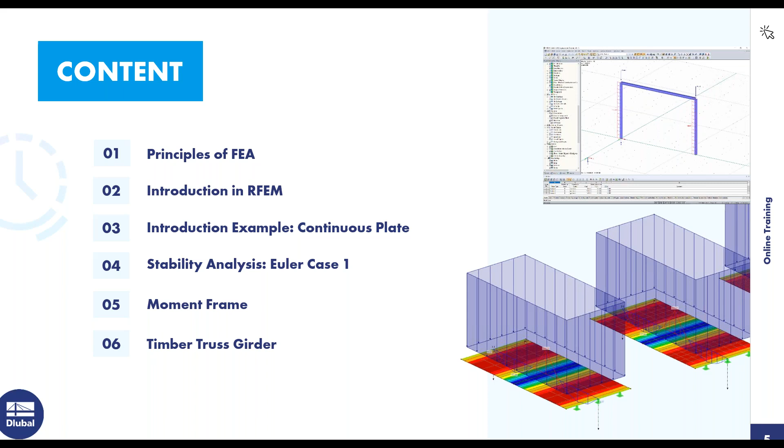With that said, we can jump into going over the basics of FEA. When using computer software, it's based on the displacement method, and another method you may be aware of is the force method, where the unknown is the force, and the internal forces can be calculated based off of this. With the displacement method, the unknown is displacement, and to solve for this, the displacement vectors must be calculated, and then the internal forces and support reactions can be figured out. The main problem today is when it comes to analytical solutions, they can be difficult to determine for large complicated structures.

Doing hand calculations for some structures with complicated and odd geometry can almost feel impossible, and the limits are being reached with large complicated structures, so it's difficult to get accurate results. This is where FEA software comes in. Complicated structures are modeled and converted into a finite interconnected element mesh, and then the material and cross-section properties are given at each FE node. Then the mechanical behavior is transferred between these elements.

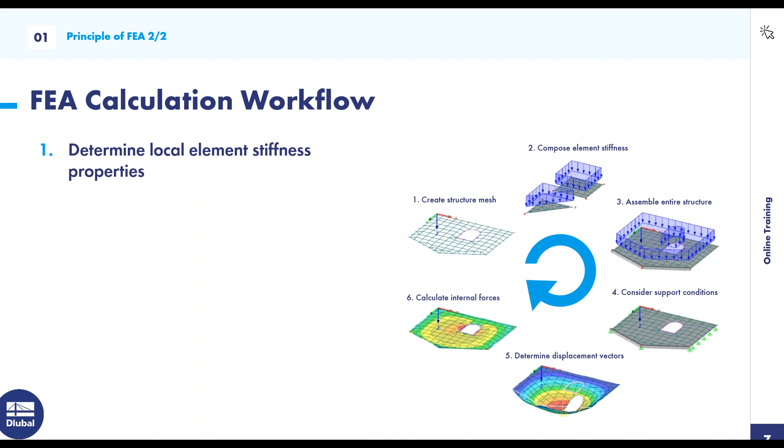Next, I want to go over the FEA calculation workflow. This is good to know for most FEA softwares, and is basically the workflow for them. First, the local element stiffness properties are determined. Then those local stiffness properties are transferred to the global coordinate system, and the assembly of the entire structure takes place. The boundary conditions or supports are then defined—these could consist of sliding, rigid, or hinged. Then the displacement vectors can be calculated by solving the system of equations, and lastly the support forces and internal forces can be determined.

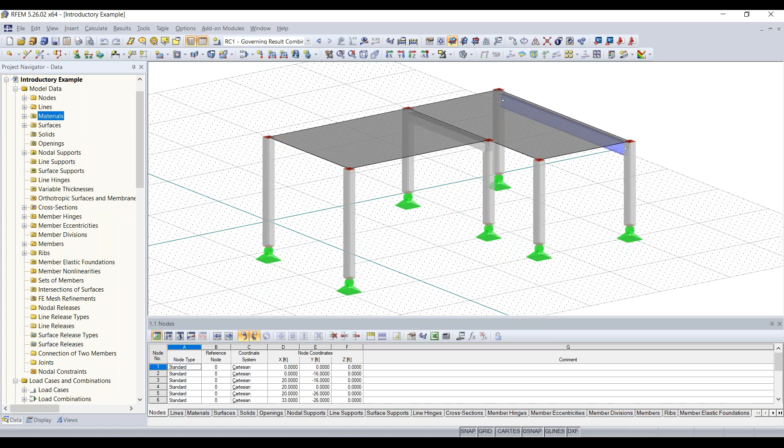And then next we have our tables down here at the bottom. These tables can act like your project navigator, basically going through and organizing all of your model data. But with the tables, you can change anything or add in model data. So if you wanted to model your whole entire structure with the tables, that is possible to do. So you can utilize that workflow if you'd like.

Also, you can change the background color. So if we wanted to go up here into options and we wanted a black background, we could go to the configuration manager, and then you can see that we can change our background to black if we would like, and also some other options as well. I'm going to keep mine white.

Then also we have the insert menu up here, which organizes all of the tools. So if you wanted to insert nodes, lines, materials, members, this is all organized up here in this tool table drop-down window. That's helpful if you don't want to use the tools up in your toolbar, which is the next thing to go over.

So here is all of your tools, basic tools that you need to go through and model your model. If your toolbar doesn't look like this, you can rearrange your tools, but also if you just like that done automatically, you can right click anywhere in this gray space and hit reset to default, and then that'll reset your toolbar to look like mine. I think this is the best layout - everything's organized where it should be, and I think it's helpful.

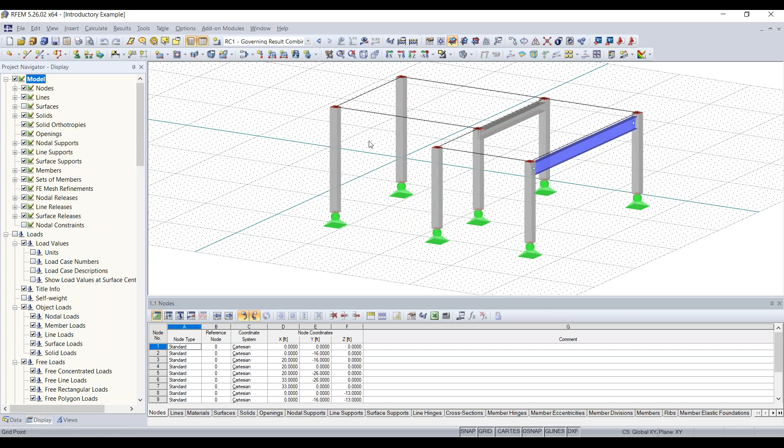We'll go over those more in depth later on, but the next tab down here in our project navigator is the display tab, and this allows you to turn off aspects in the graphical window. So if you wanted to turn off something like surfaces for some reason, this just turns off the display - it doesn't actually get rid of the surface.

So these surfaces are still there, just not displayed. You can turn things on and off in here, and you can manipulate results and things. We'll go over this also more in detail later.

And then we have our views tab. Here we can set visibilities, and we can view things based on members by cross section. So if I only wanted to view my W18 by 50 cross sections in my model, I could do that, and you can see it grays out the rest of the model, and I can easily point out my certain cross section there.

The fourth tab, which you can't see right now, is the results tab. So if I go up here and hit show results, and turn off my visibilities, now we have the fourth tab here, the results tab, and this is how we choose which results we'd like to show on our model. Right now I could show just my global deformations, and now you can see the global deformations graphically as well.

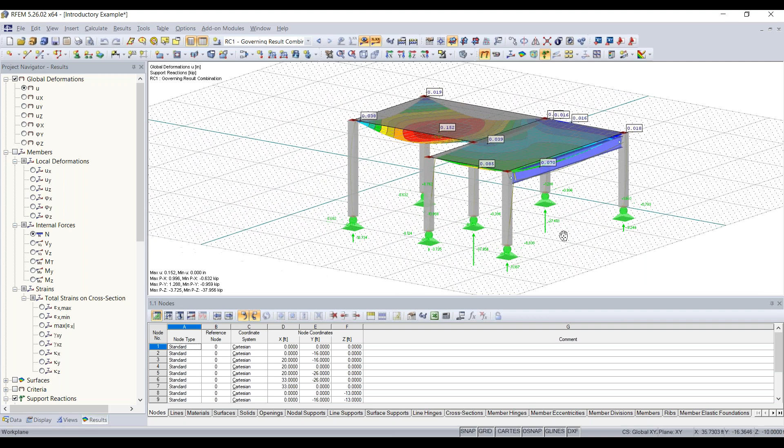We'll go over how to view results and use this efficiently within the upcoming examples. Last thing to go over is just movement. If you have a mouse with a scroll wheel, you can press in the scroll wheel to move in your model in translation. You can also use the scroll wheel to zoom in and out. And if you hold Control and press in the scroll wheel, you can rotate your model.

So those are the basic movements. If you don't have a mouse and you're using a trackpad, you can use the keyboard arrow keys to move around. You can also hold Control and use the arrow keys to rotate, and then hit the plus and minus buttons to zoom in and out.

So before we get into the continuous plate example, I just would like to pose one question: what is RFEM? If everyone wants to put their answer in the chat, then we can go over the correct answer in a minute.

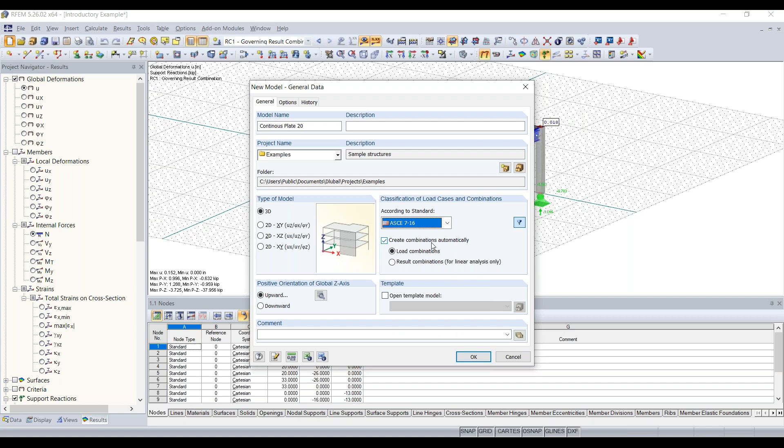So then type of model - this one is going to be a 3D model. And then the classification of load cases and combinations: you can have your load cases and combinations generated automatically according to a standard. If I hit this dropdown, you can see we have most standards here to choose from. For today, I'm just going to use ASCE 7-16 for this example, but we could have used any other standard as well. Check off this box to have the combinations created automatically.

And then down here, you can set the orientation of your global z-axis. There are two axis systems: the global axis system and the local axis system. If I click on this details button here, you can see that each element in RFEM has a local axis system, and we want to have this set to upward.

Now that all of these options are chosen, we can click OK in our general data.

One other thing I'd like to mention is I'll be using imperial units for this example, but you can change between imperial units and metric units pretty easily by going up to Options, then Units and Decimal Places.

If I wanted to switch from imperial units, I could open this up, and there's a button called Load Saved Profile. RFEM comes with two load saved profiles by default, metric and imperial. If I wanted to switch to metric, I'd just double click on it, or if I wanted to set metric as my default, I'd check off this box. For now, for this example, I'll be sticking with imperial, but know that you can switch back and forth pretty easily.

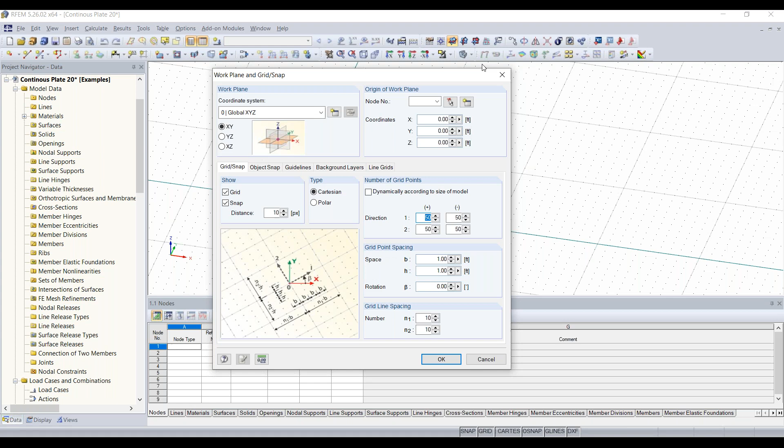Now you can see we have our blank work window here. We have our grid, which for imperial is 50 feet by 50 feet, and each grid point is spaced one foot apart. You can go up to the settings of Work Plane/Grid to change any of these parameters. Under grid point spacing, the base and height is 1 foot, and in each direction there are 50 grid points, so my grid is 50 by 50 up in the second quadrant here.

Now the first thing we want to do is create one of our plates. To do that, there's a tool called New Rectangular Surface. If I click on that, this dialog box will pop up called New Rectangular Surface.

The first thing we want to do is create our material. I already have a material loaded in, but if you don't have this loaded in, you'll want to create a new material. You can create your own custom material by entering the material constants, or we can choose a material from the material library that RFEM has built in.

I'll choose that, and the material library dialog box will pop up. On the left-hand side, you can filter to concrete, so for this example we'll be using concrete, and then the material category. For this example, I'm going to use the ACI standard, but you can also choose from other standards to pick your material out. You can see we have the Canadian standard as well as Eurocode.

So I'll choose ACI, and then the 2019 latest standard, and I want this to be 4,000 PSI concrete. At the bottom, you can also see your material constants or material properties if you'd like to check those. So I'll just hit OK.

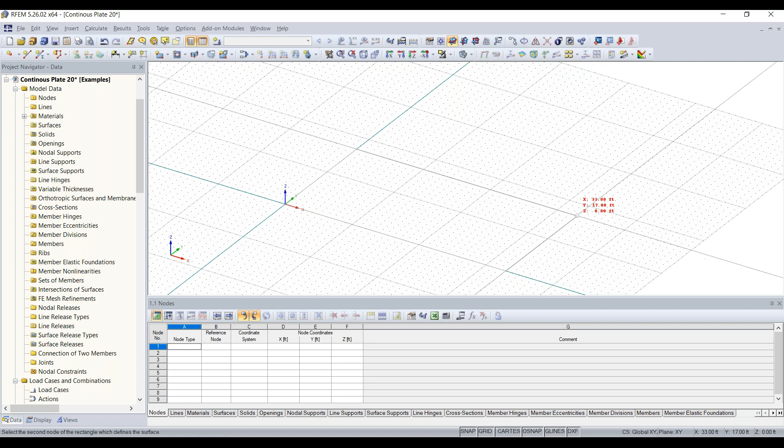You can see my cursor has turned into this reticle, so I can snap to any of these grid points to put down the first corner. The first corner is going to be located at the origin, so I'll left click on the origin, and then this plate's going to be 32 feet by 16 feet. I'll go 32 and then up here to 16, and then click again. Now you can see our first plate has been created.

Now the next thing we can do is either just draw the same plate up at the top here, or use the move and copy tool. I'm going to right click to cancel out of that tool, then highlight the whole plate. I can hold my control key down and then left click, and move this plate up, spacing these two plates out by 5 feet.

The other option you can use is the actual move and/or copy tool. If I highlight the second plate here, then go up to this tool called Move and/or Copy, I can click on that, make one copy of this plate, and move it in the Y direction 21 feet.

And then I'll click OK. Now you can see that I created a second copy of the plate at 21 feet. The reason for that is because I wanted it spaced 5 feet from this plate here.

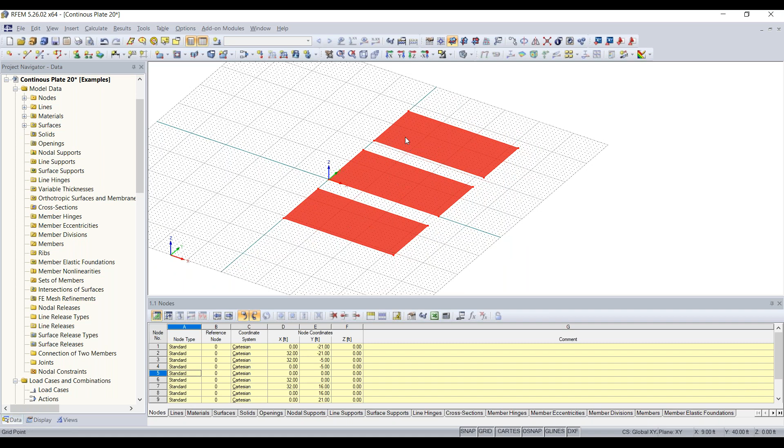So now you can see we have all 3 of our plates, and there are a couple ways of modeling your plates or modeling a copy of something. Just to clean up the model a little bit, I'm going to highlight all 3 of these, and I'm going to drag this bottom left-hand corner of the second plate down to the origin, just to keep our plates within our grid here. And then I also want to make some space for the beam that we're about to model at the top.

So to create a continuous beam, we're going to go up here to new single member. In this new member dialog box, it looks a little similar to the one for surfaces, but it's a little more complex, as you can see. So what we want to do is tell the program basically what cross-section and material this member is going to be. You can see there's a member start and end, so just focus on the member start. The whole entire member will be this cross-section and material.

We can click on this button here, create new cross-section. Then you can see you can enter manually the cross-section properties, just like the surface, or you can go up here to this button, import cross-section from library, which is what we want to do. So we'll click on that.

Then you can see we have our categories here in the material or the cross-section library. So we have our rolled cross-sections based on standardized rolled cross-sections, and then we have our built-up sections here, and then we have our parametric thin-walled sections. So you can change these dimensions or input them manually as you would like. Then we have parametric massive, which is what we're going to use for our concrete continuous beam. And then parametric timber, and we have standardized timber down here.

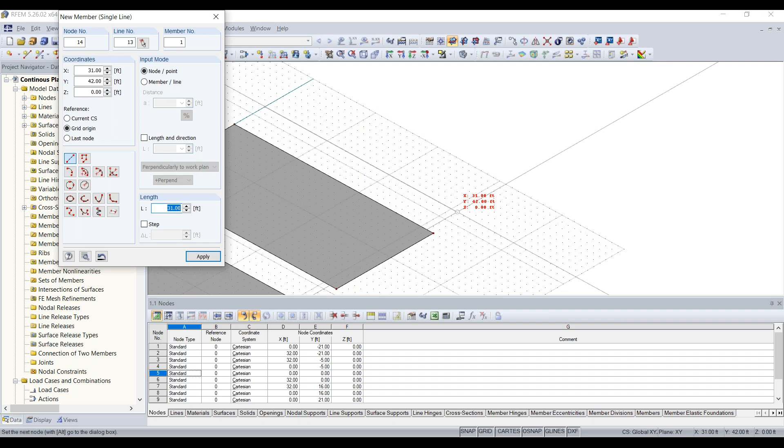And then I can start drawing my beam. I'm going to make this 5 feet away from the plate, like the other plates. So I'll just click for the member start, and then I'll click for the member end, and I'll right click to cancel out. Now you can see we have our continuous beam here.

So now the next thing we want to do is divide these lines here, because we're going to add in some center supports to the midspan of our plates. There are multiple ways of dividing lines in RFEM. I can just right click on this line here, and my shortcuts menu will pop up, and I want to go to divide line. You can see there are 3 options for dividing a line. I can divide it graphically, which allows me to snap to a grid point, and I want to divide it directly in the middle at 16 feet. I could just keep going to the next lines to divide them.

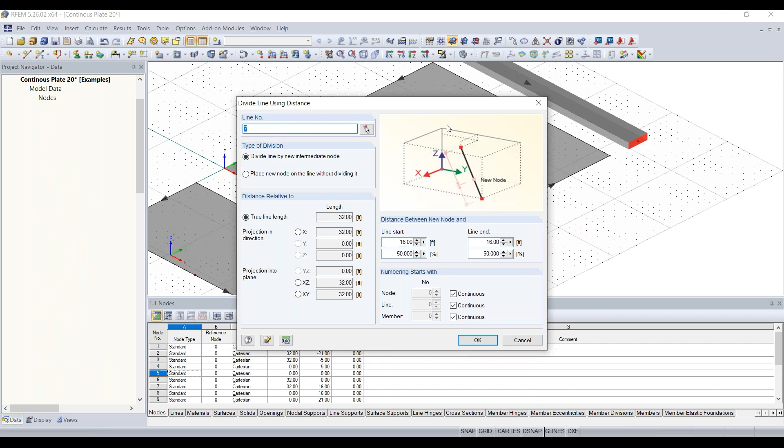But there are also a couple other options. I can divide them by an intermediate node, and this will just divide it evenly. So if I just choose one node, it'll put a node directly in the center of that line. And then the third option is you can do it by distance. So if you really want to get accurate on where this node is going to be, I can either do it 16 feet from the start or 16 feet from the end or 50%, so it's in the middle. And basically I can just hit OK.

And now it's going to put that node right in the middle. If you're ever confused about the direction you drew your lines, you can hover over them and see an arrow telling you which way you drew your line.

This is helpful mostly for members, but also for lines if you're dividing them and not sure where the member start or end is. So then I'll just do the rest of these graphically. I'm going to place some nodes here right in the middle, then divide my member using n intermediate nodes.

We'll click OK, and now you can see my beam here is divided into two sections. So now we can create, now we can add our supports. Actually, before we do that, we need to add in lines to connect these nodes. To draw a line, you go up to this tool called New Line, then we can snap to our nodes and simply draw our lines just like so.

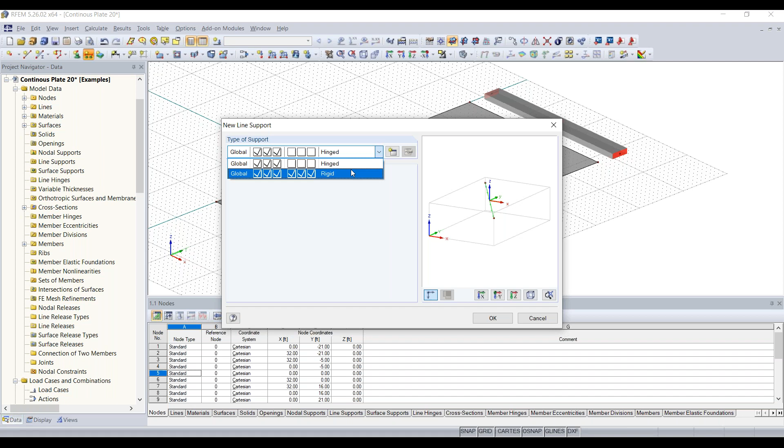So nothing can move in translation, but all of the degrees of freedom for rotation are released. You can see we have templates, or already defined supports, but if you wanted to create your own custom definition, you can create a new support here, and check or uncheck one of the degrees of freedom.

All three of these are in translation, and then we have rotation. For a hinge support, we would check and fix all of our translation directions, then uncheck and release all of our rotation degrees. We'll click OK, click OK again, and now we can select all three of our lines here.

This is going to actually be the same for our outside surface, right there. Now we just need to support our beam here, and this is going to be supported using nodal supports. So I'm going to go up here to new nodal support.

Two of these end conditions are going to be hinged, so we'll make the end here hinged and the middle hinged. But what we need to do is fix the rotation about the beam's axis here. So if I right click, we can show the local axis system of this beam, and that'll show the local axis system of all of the lines there.

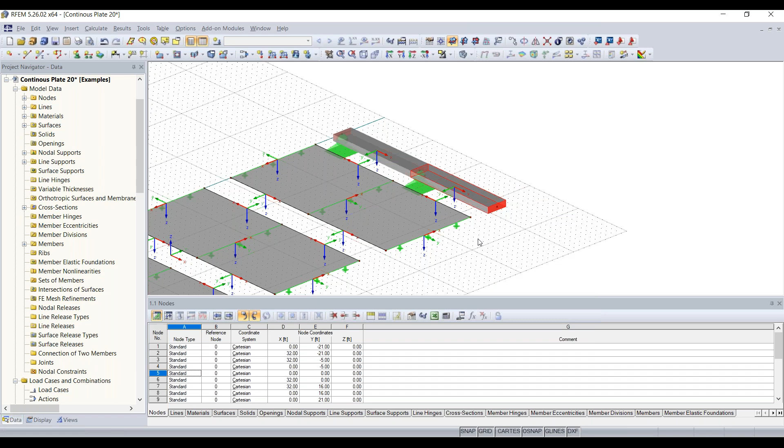Let's turn that off. So here's the local axis system of the member here. What we need to do is if we put a third hinge support here, then the member would be able to infinitely rotate about its x-axis, and that would cause an instability in the program.

So what we want to do is go up here and click on new nodal support, and create a new type of nodal support. We want to fix the rotation about the x-axis, keeping the member from rotating about it infinitely in the program. Now you can see the difference between the support with the fixed X rotation and these two hinge supports that have it released.

So now that we have all of our plates and our beam fixed, we can now get into loading. Before we can add in any loading, it's important that we create a load case, because every load needs to be assigned to a load case within the program. So what we want to do is go up here to this button, new load case.

This will open up our edit load case, load cases and combinations dialog box, and you can see a load case has already been created. Now what we want to do is give this load case a description, so this will be test, and the action category according to ASCE 7 is dead. This is fine, we don't really need to worry about action categories for this model.

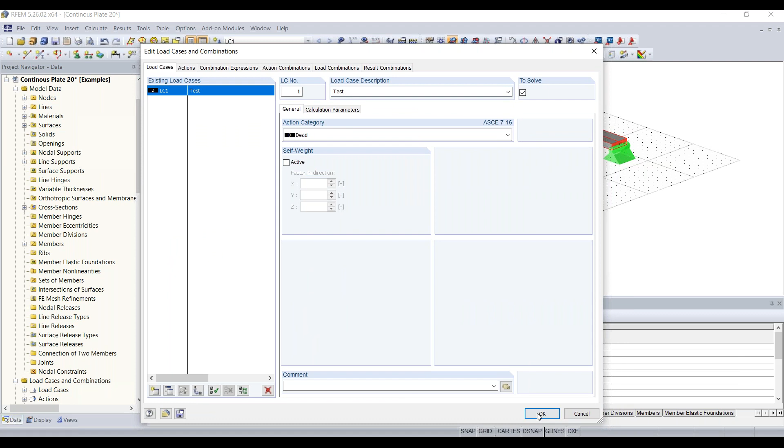We're just going to use this load case to add in our loading. You can see self-weight for the dead load action category is automatically checked, so this will take self-weight into account for your model. What we want to do is uncheck that for this example, and we'll click OK.

Now you can see we have our load case here, test. Any loading we add right now will be added underneath this test load case. So now what we want to do is create some surface loads to apply to our plates here, and we're going to go up to the tool called new surface load.

This is the new surface load dialog box, and we want it to be a force. You can see there are multiple different load types here. For load distribution, we want it to be uniform, and we want it to act in the global Z direction for our load direction, so it'll be acting downwards. Now we just need to specify a magnitude. We'll add a negative sign, and it's going to be 210 pounds per square foot, so that'll be 0.21 KSF. Then we can click OK.

Now we can just select our surfaces here and apply that loading to them. We can't apply that to our beam here because this is a member and not a surface.

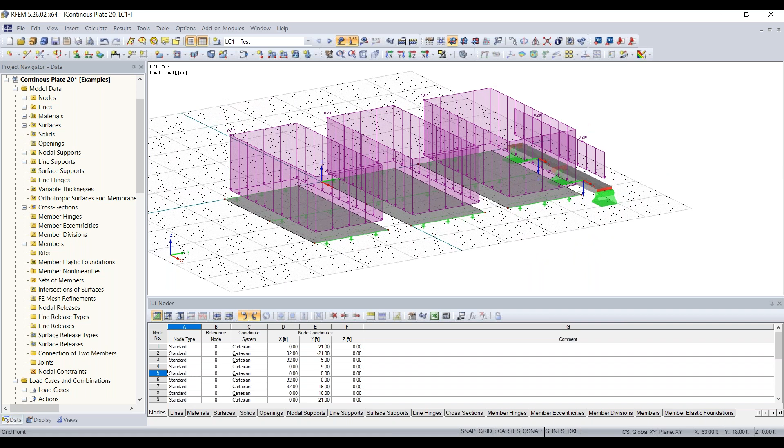Next thing we want to do is, for example purposes, create some FE mesh refinements. For now, I'm going to unshow the loading on our model just to get a better look. To add in FE mesh refinements, we can simply right click on one of our surfaces, and there's an option here called FE mesh refinement. We want to go to new, and now we just need to create a new FE mesh refinement definition.

What this does is allow us to specify an FE length for a specific surface. For this plate, we want the element length to be 0.2. We'll click OK and click OK again. Then you'll see this symbol applied to the surface, saying that there's an FE mesh refinement here. So the whole entire surface will have an FE mesh length of 0.2 feet.

Then we're going to do kind of the same thing for this next surface. We'll right click on it, go to FE mesh refinement, and then go to new. You can see that definition I made earlier of 0.2 feet was saved, but we want to create a new definition again, and this one is going to be 0.4 feet.

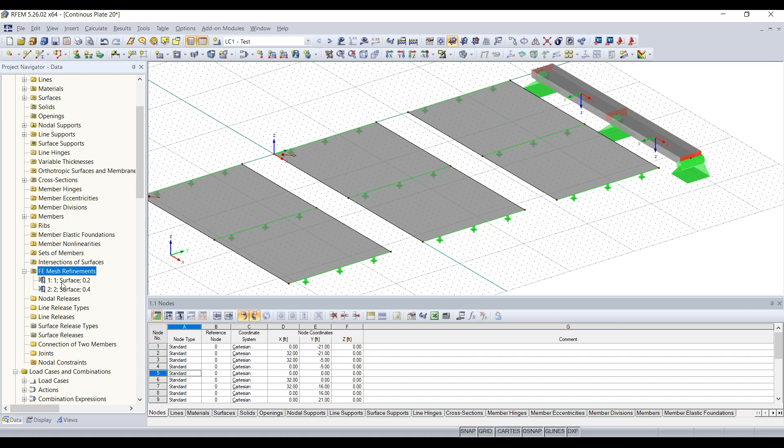Then we're going to do the exact same thing for the third one. We can also go to the project navigator, and you can see now the FE mesh refinements folder has a plus sign next to it, saying that we have some FE mesh refinements in our model. What we could do is right click on this folder and then click on new FE mesh refinement. This third one is going to be 0.6 feet.

So you might be catching on to the reason for doing this. I've got to specify the surface up here so we can do that graphically. I'll select that surface. What this is going to do is allow us to see the difference in results depending on the size of your FE mesh, so that'll be interesting once we run our results.

Next thing we want to do is create some section cuts for our plates here. This will also allow us to view the results of the section cut right through our plate. So to create a section cut, we can go up here to define section and results diagram, and we can go to create section numerically.

And then the section name, I'm just going to name this one AA, and we need to choose where point A and point B of our cut will be. We can use this button here, select edge points of the section, so I can snap to the center point of this line here, and then snap to the center point of this other side. So this will be point B. And that's basically everything you need to set.

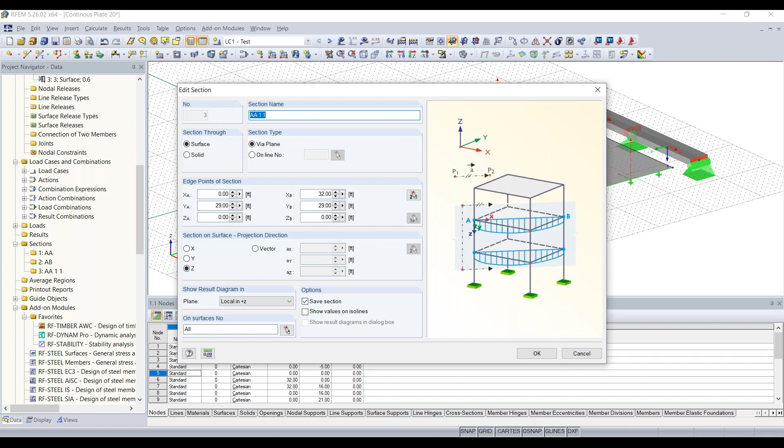And you can see the names are a little awkward, so what we can do is go over here to the project navigator, go to our folders and look for sections. We can expand that and double click on our section cuts here and just easily edit the name real quick. You can do that for the last one. Click OK. And now we have our section cuts.

And then now we're all ready to run our calculation. So we can either just hit show results to see the results for our LC1 here, but if we wanted to run the results for all of our load cases and combinations and everything, we can just go over here to this button called calculate all. And what this will do is just run through the calculations, and it should be ready pretty quickly for this model.

So now you can see we have our global deformations now shown on our plates and also our beam here. Right now it's just a yellow line showing the deformations for the beam.

And then you can see now we're in our results tab on our project navigator, so this is where we can choose what results we want to show. Right now I have global deformations checked, and that's the resultant. You can also take a look at the components in the X, Y, and Z directions as well. Right now we're getting a max deformation of 0.02 inches, so pretty minimal.

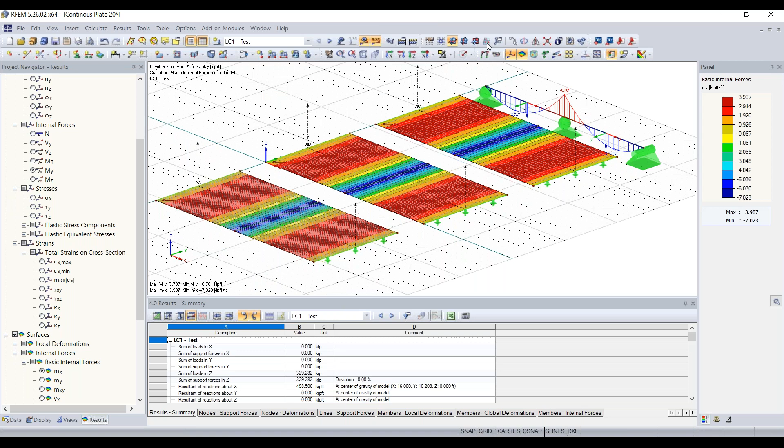I can go to the local axis system, and now you can see what that looks like on our plates. And so in order to see the results better, I can also activate those on our plates. I can activate my section cuts.

So if I scroll down here in the results tab, still in the results tab, everything's just expanded, but you can see we have sections now, and I can activate those. And now you can see the results for our moments better, just with moment diagrams, basically through that section cut on our plates here. And maybe now you can also see the difference in accuracy between our plates here, depending on the FE mesh size we chose.

So this first one was 0.2, and then we increased the length between all of them. So that's showing you how the results and accuracy can change.

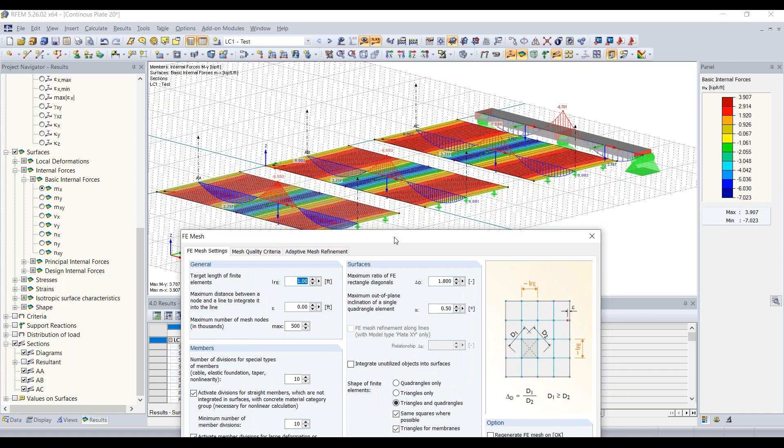Also, now's a good time to mention that the size you pick for your FE mesh does affect your results. If we go to calculate and FE mesh settings, this first general option, target length of finite elements, is your global FE mesh. If we didn't add refinements to these plates, 1 foot would have been the mesh size, which would have probably been a little too big for these plates. You can see how the results change depending on the mesh size you choose.

Next thing I want to show you is if we go again to calculate, and then calculation parameters. Another topic I want to get into is shear stiffness.

First I want to show you how, with this option, you can deactivate the shear stiffness of your members. Right now, by default in the program, shear stiffness is activated for members, but if I uncheck this, then it won't be. This is important because if you're trying to compare hand calculations to RFEM, RFEM is always running the calculations with shear stiffness considered.

Once I uncheck this and click OK, it's going to tell me I'll need to rerun my results because this option changes the results. I'll click no real quick just to show you, but right now our max bending moment is 6.701 kip-feet, so we'll see that it shouldn't change too much. If I hit OK, delete the results, and quickly rerun them, you should see some change. We were at 6.701, and now it increased a little to 6.72. Nothing too large a change, but important to keep in mind if you're comparing hand calcs.

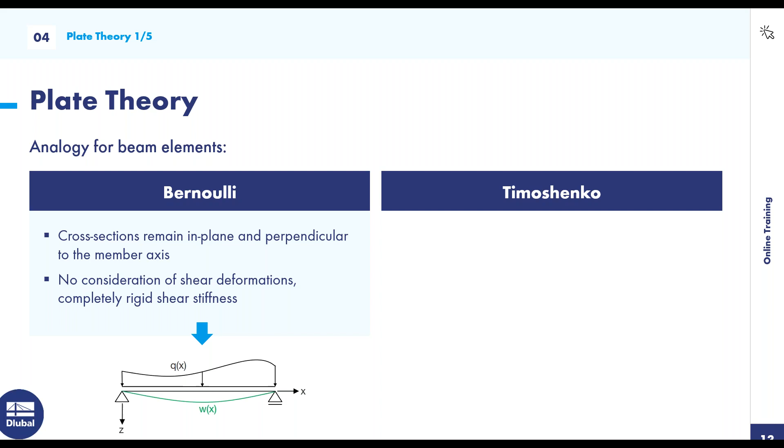With Bernoulli's theory, there are two major assumptions. The first is that the cross-section always remains in plane and is perpendicular to the member axes. The second, most importantly, is that there's no consideration of shear deformations, and the shear stiffness is completely rigid. For the Timoshenko theory, the first assumption is the same as Bernoulli's, that the cross-section remains in plane and perpendicular to the member axes. But the biggest difference is that shear deformations are taken into consideration, and the shear stiffness is limited and not completely rigid.

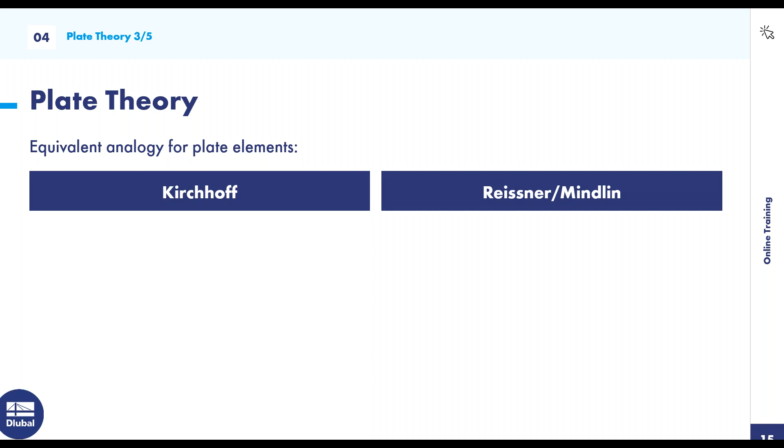Now knowing these two theories, we can apply the same idea to our plate elements, or plate theory. A similar theory to Bernoulli's theory for plate theory is Kirchhoff's theory, and similar to the Timoshenko theory is the Reissner-Mindlin theory. This works the same way for plates.

Now for the Reissner-Mindlin theory, we're assuming all of the same assumptions, and as you may have guessed by now, the shear deformations are considered for this theory. Also for this one, we're taking into consideration transverse/lateral strains.

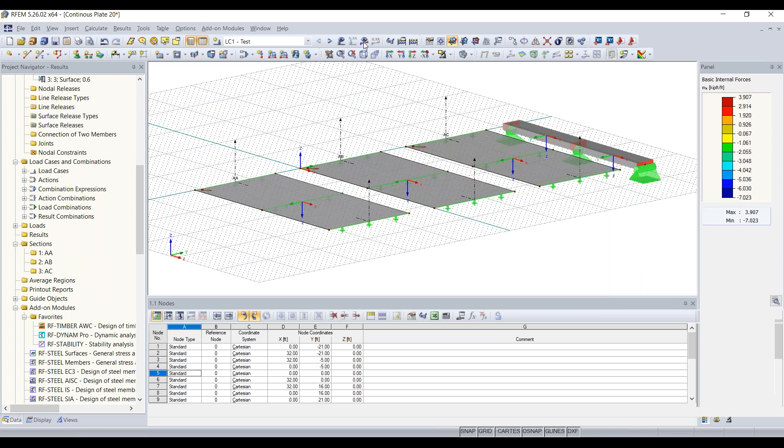So if we switch to that right now, you can hopefully see these results. So about 6.592, we'll just keep an eye on this one, 6.594. If we change this and click OK, it's going to ask us to recalculate. And if we run this calculation real quick again, we should see that our bending moments will increase from the decreased deformation. So it was about 6.6, it was about 6.59. Not much change in results, but still just increased accuracy with the Reissner-Mindlin theory.

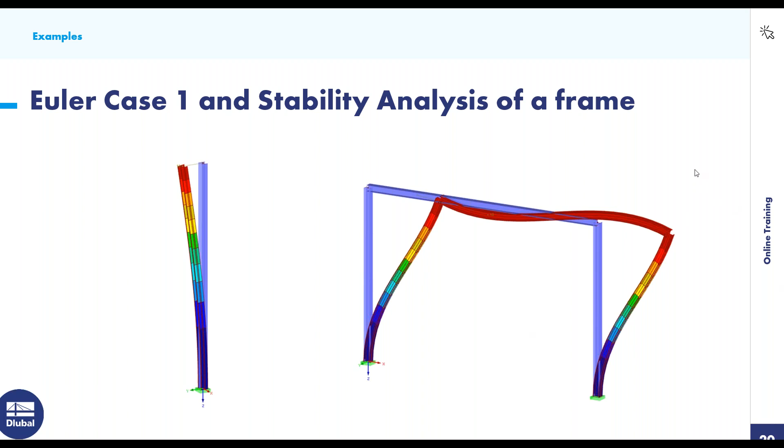That will be the Euler case 1 example. With this, we can hop back into RFEM. And now for this example, we'll be creating a new model.

We'll go up here to new model, and the name of this will be Euler case 1. Everything else will stay the same. It's going to be a 3D model. We'll just keep our load cases and combinations created automatically. Everything is set, so we'll hit OK.

So now again, we have our blank grid here. And the first thing we want to do is create a new cross section. We can go up here to new single member. And this new member, we'll create a new member and use the cross section library.

This is going to be a W shape. We'll filter to the AISC and the manufacturer, and then we'll choose W shape. And then this is going to be a W shape 12 by 35. So we'll scroll down here to 12 by 35.

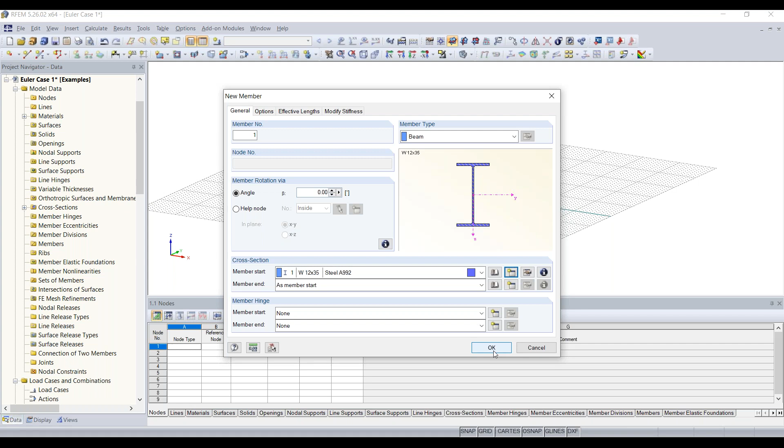We don't want it made out of concrete, so we can go to import material from material library. And it'll be metal, steel, and we'll use the ASTM for this example, and we'll just make it steel A992. Click OK, and then click OK again, and click OK one more time.

This is going to be a 30-foot tall column, and we basically want to draw this member perpendicular to our plane here. So a couple options for that. We can either choose the option in this tool here, length and direction, and just type in 30 feet and select the option perpendicularly to work plane in the positive direction.

Now you can see I can just draw this. I can select the origin here, and the program will just draw that member 30 feet perpendicular to our grid here. The other option would have been...

...to change our work plane. We can do that up here with these three options. Right now the work plane is in the XY plane, but we could have drawn our member up the plane there, and you can see again it's 30 feet tall. So we'll just change our grid back to the XY plane.

Next thing we want to do is support this column. So we'll just highlight from left to right to only select the node down here at the bottom. Then we can go up here to new nodal support. We want this nodal support to be a completely rigid support, so all 6 degrees of freedom are fixed. We'll click OK, and now we have our column framing into the support. Basically this is our model.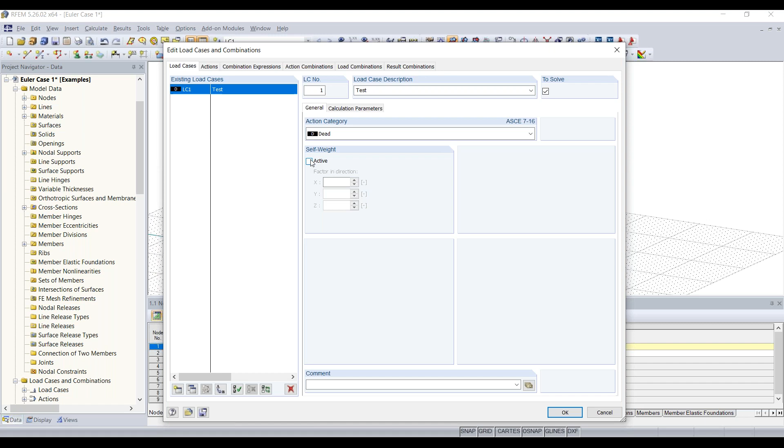So what we want to do now is create a new load case. We'll go up here to new load case and we'll name it test, just like we did in the previous model. We'll turn off self-weight, deactivate that, and then we can click OK.

Now what we want to do is add in some nodal loads to our column here. We can drag from left to right to select our node up here at the top, and then choose the tool new nodal load. The force will be 5 kips in the Z direction, so -5, a gravity load. And we'll add just a lateral load in the X direction of 2 kips. Once we do that, we'll click OK.

Now you can see those loads are added to the top of our column here. Next thing I want to do is show you something very important, so I'll hit calculate. Then we can take a look at our deformations. If we look at this column from our side view, you can see it's deforming in the X direction.

If we go to display, and then we choose under results, under deformations, and under members, we can choose colored sections, or cross sections colored. Now you can see the cross section here that's deformed, and we're getting a max deformation of 3.78 inches.

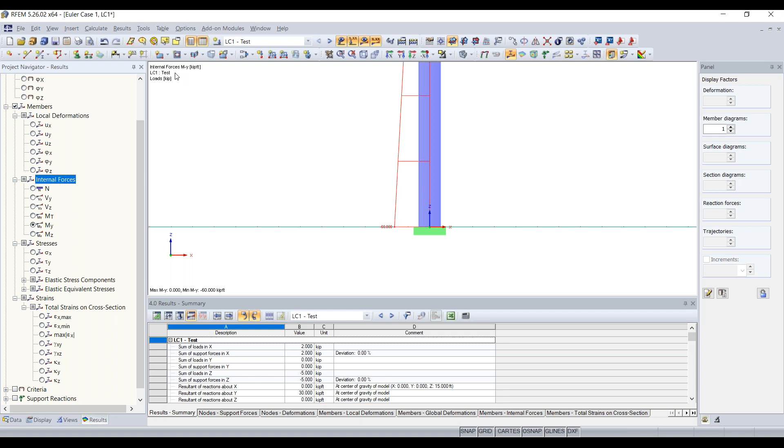Then we can also take a look at our internal forces. I'll check on members. Under internal forces here, I can show the bending moment about the y-axis. You can see at the bottom here is where we're getting our max bending moment of -60 kip feet.

And with that shown, we're getting a max moment of 60 kip feet at the bottom and a max deformation in the X direction of 3.782 inches. So keep that in mind.

Now I want to show you how this linear or first order calculation differs from a second order calculation. So what I'm going to do is open up the load cases and combinations box.

By default, all load cases are calculated based on a first order analysis. So this is our load case here. And if we go under calculation parameters, you can see we have a couple options for the method of analysis.

Load cases are calculated according to a geometrically linear analysis, whereas load combinations, which combine load cases into bigger combinations, are calculated based on a second order analysis, which takes little and big P delta into account. What we can do is change our load case to a second order analysis.

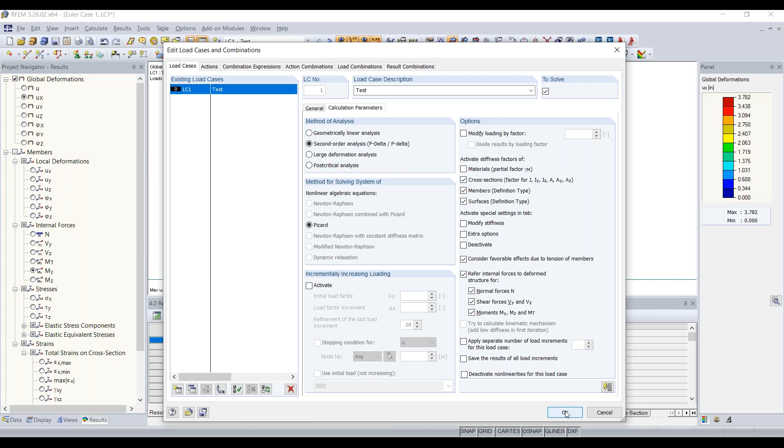So what I can do is show you how these results and deformations change based on changing this to a second order analysis. You should see that the deformations and bending moment will increase because of the P delta effect. Now we're getting a max deformation of 3.9 inches, which will in turn increase our max bending moment to 61.6 kip feet, mostly because of that increased moment arm.

So keep this in mind when you are looking at load cases and load combinations, where the results can change depending on whether a first order or second order analysis is run.

Another quick note is that members in RFEM are determined to be either a beam or column based on how the loads are applied. In this case, we have a column here, mostly because of the axial force applied to it. So even though if we double click on this member the member type is set to beam, this is the member type you want to use whether you're modeling a beam or a column. It all just depends on the internal forces within the member.

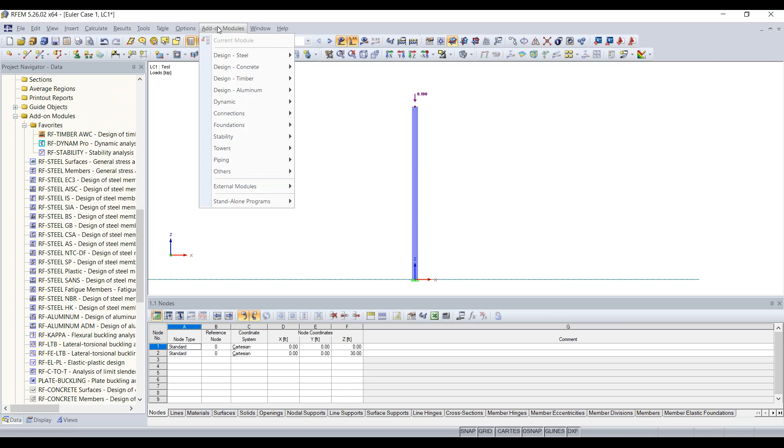To access that, we can either scroll down here to the add-on modules folder and look for RF Stability. I have it saved up here in my favorites folder, or you can also go up here to add-on modules, then go to stability, and then RF Stability. And you'll see the RF Stability add-on module open up, which is basically just a dialog box within RFEM.

Just some quick background on stability analysis: Euler was a mathematician who came up with different cases to show the critical loads, as well as critical load factors, as well as critical loads and lengths.

This is something that every stability analysis does, and it's important, when you're using this module, to activate the division of straight members. You can see that's activated by default already. You can edit the options for this.

If we go to edit FE mesh settings, we can go down here to the minimum number of member divisions, and change this from 2 to 10. What this does is just increase the accuracy of your results. So we'll click OK, and that's basically everything we need to change.

So we're running this stability analysis based on our load case 1 here, and the number of lowest eigenvalues we're showing is 4. That's also by default, and everything else we really don't need to worry about. So we can hit calculate.

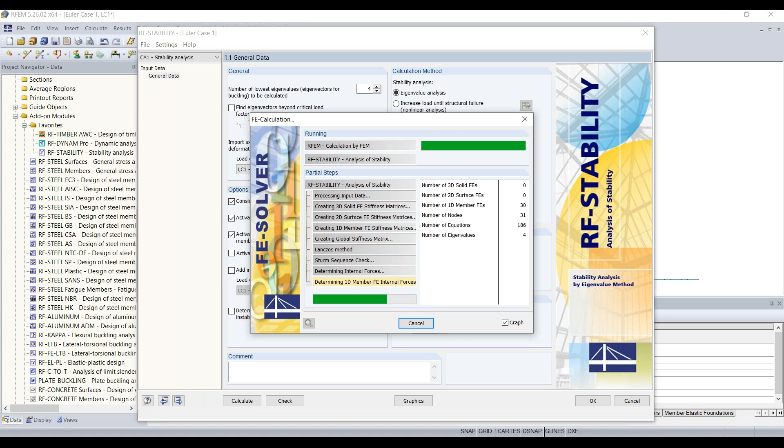Once the calculation is done running, you can see we have our results here. And we can take a look at our critical load factors for each of our eigenmodes. So our critical load factor for this first eigenmode is 135.

The critical load factor is the amount you would have to multiply your loads by in order to get an unstable system. Or it can be looked at as the total percent of the loads your structure can take. So it's very important to keep in mind, if this number is under 1, that means your structure can't handle 100% of the loading that's applied to it.

So I have only 100 pounds applied to this column. And let's say this number was under 1, if it was 0.9, then my column would only be able to handle 90 pounds, and anything exceeding that would cause an instability. So that's the basic understanding of the critical load factor here.

And then next thing we have is our effective lengths. We can take a look at our effective lengths for our member here for each eigenvector. And we can also take a look at the critical load here.

We can also view our results graphically and take a look at our eigenvectors. So if I go down here and click graphic, then we can turn our model around and you can now get a better look at the first buckling case or buckling form.

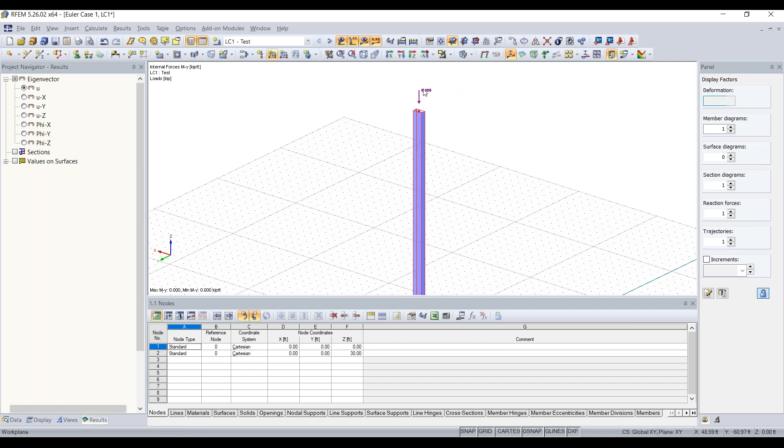I would just like to show you guys what it looks like when the structure is unstable. So we can go to our LC1 here and then double click on our loading. If we increase this load from 100 pounds to something like 14 kips, we can click OK.

Before we run our stability analysis, we already know that this structure is unstable. If you have an unstable structure, you need to make sure that you are not running a second order analysis, because then RF Stability will not be able to show you the critical load factors. So we'll go back into our calculation parameters and turn this back into a linear analysis.

And then we'll go back into RF Stability and hit calculate. Once this is done, you should see we will get a critical load factor below 1. So we have now a critical load factor of 0.966. This factor being under 1 is telling us that our structure cannot take 100% of the 14 kips that we applied to it.

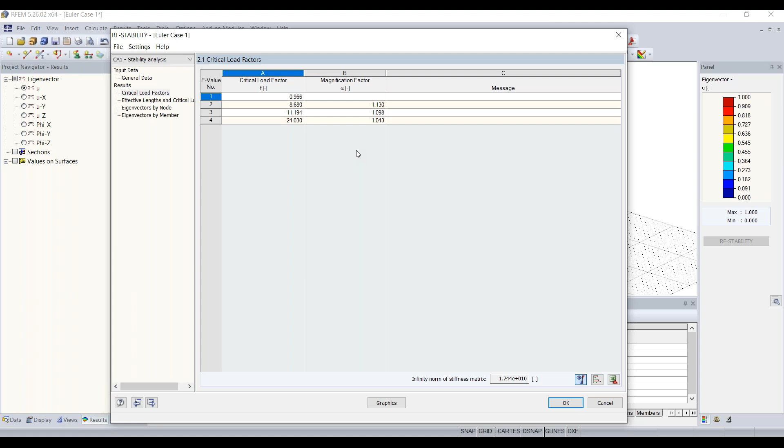So that's one way, if you have a structure and you're getting an instability and you made sure everything's connected and everything looks modeled correctly, this is one way to tell if you need to maybe optimize some of your model.

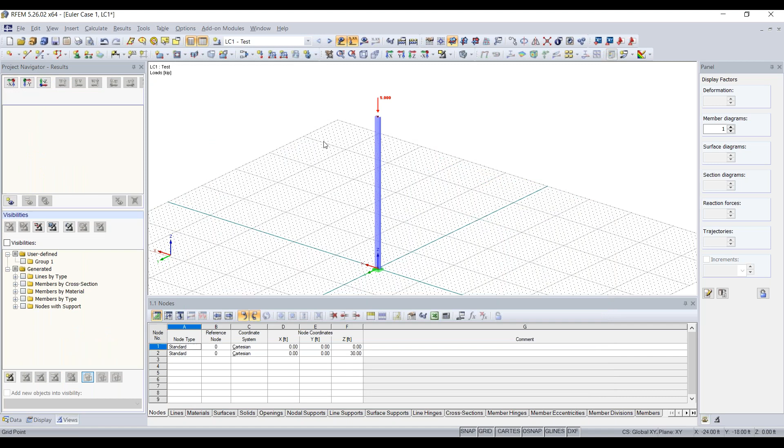And what we can do is now start creating our moment frame. So we're going to turn this column into a moment frame basically. To do that, we can change our force here back to -5 kips, and we won't add any lateral loading.

And then we can take this column and just highlight the whole thing, hold Control and select one of the nodes, and make another copy 10 feet away. Then we take or highlight these top nodes here, and if I change my work plane back to the XZ plane, I can simply highlight both of the nodes from left to right to only select them. Then I can left click and drag these down to about 10 feet. Now we have our columns for our frame.

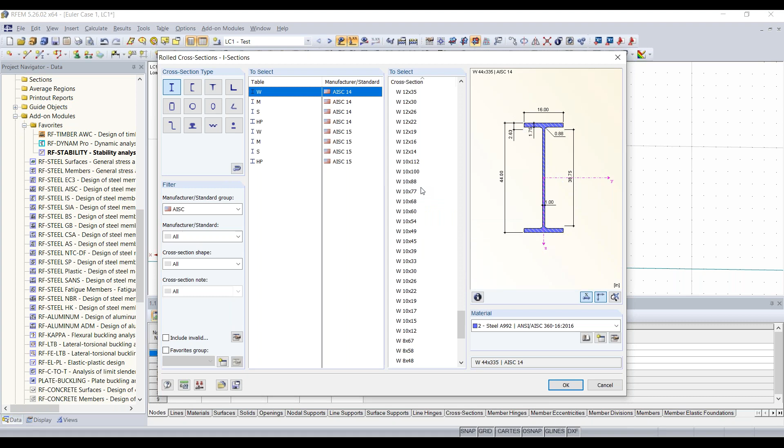Now we want to create the beam for the top of our frame. So we'll go up to the create new member tool, and the beam connecting these two is going to need a new cross section. We'll go to W sections, and this beam is going to be an 8x15, so we'll scroll down. We'll make it steel A992, so it's okay. Click OK, and then we can connect both of these columns.

Like so, with our beam. And now we have our moment frame.

So what we can do, just to make this a little more interesting, is add in a new member load. This new member load is going to be -3 kip per feet, a uniform force in the global z-axis direction. We'll click OK, add in our loading onto the top of our beam, and then we can run our calculation. So I'll just say calculate all, and then we can check out the internal forces and critical load factors.

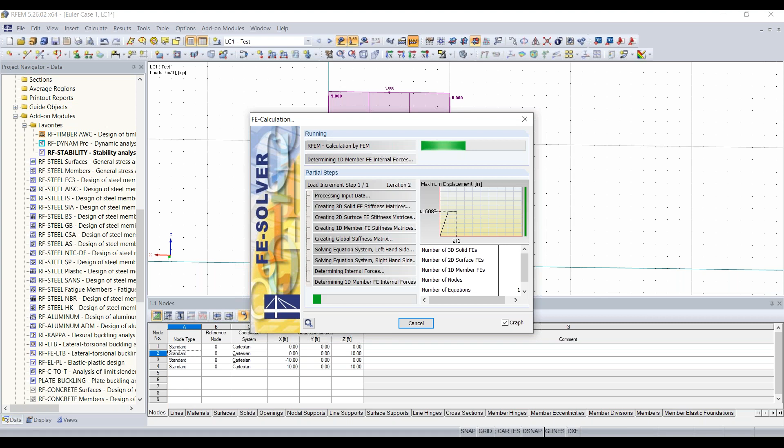And now you can see we have our moments here along with our deformation.

And since we hit calculate all, we can go to our stability and take a look at the stability analysis that ran. Right now we're looking at our first eigenmode here, which is 4.89, so that's great, stable. Then we can scroll through and look at our other eigenmodes. You can see that this frame is bending out of plane, which is not ideal.

I can increase that by a factor, exaggerate it a little bit, so now we can see what the major issue is. If we had too high of a load, this is something we'd want to consider.

So we can add in some supports here to keep this from bending out of plane. If I hold Control and select both of the nodes here, I can add in some nodal supports, create a new nodal support, and then change my degrees of freedom to only support it in the Y direction, to keep it in plane. So everything else can move up and down, left and right, it can rotate, but it just can't move in and out of the plane. We'll click OK, and now we have these supports up here at the corners.

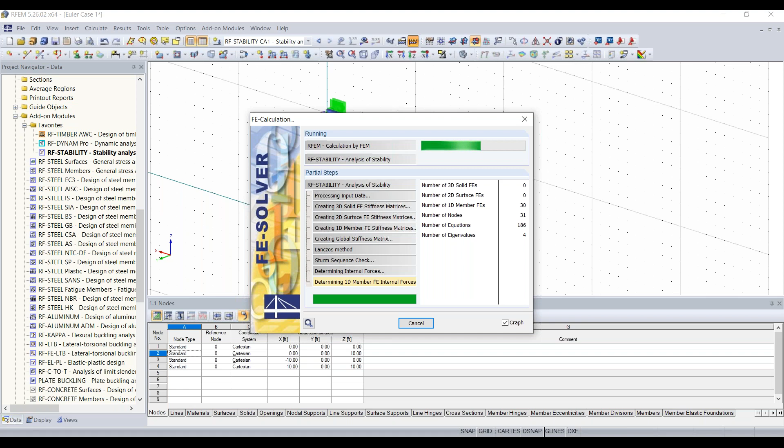And if we rerun our calculation, we should see some better looking eigenmodes. Yep, so our first eigenmode, or critical load factor, increased from 4 to 21, so that's looking good, and we have no bending out of the plane for our frame here. Again, you can scroll through and take a look at the other modes.

Also, you can take a look at the support reactions, something else I didn't show. Yeah, so we have our support reactions here. So that's basically the moment frame.

So now we can move on and get into the next example, which is the timber truss girder. This example will be basically just modeling this truss, then loading it, supporting it, and then I can show you how to design these members, and we'll be doing that based on the AWC standard. So let's hop into it.

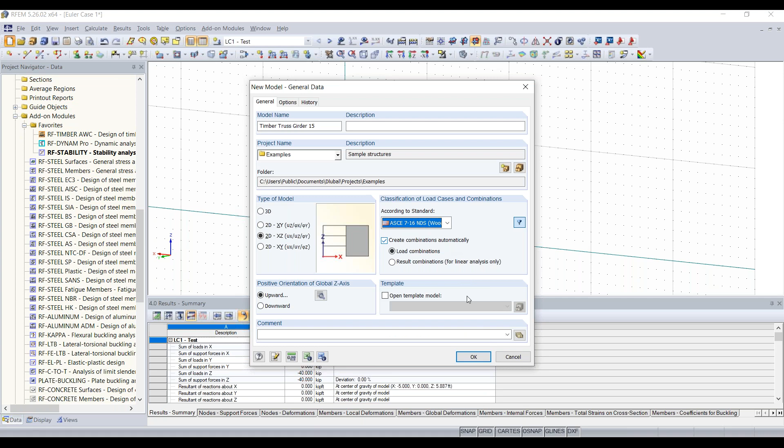And to start, we have again our blank grid here. You can see since this is only a 2D model, we can only keep our grid in the XZ plane - can't move it in and out of the plane here.

There's plenty of ways that we could go about modeling this truss. We could draw our members manually and measure them out and everything, or we can use a tool that RFEM has built in for creating truss systems.

So if we go up here to tools, and then we go to generate model members, you can see we have a couple of options here for generating different models like 2D frames, tapered 2D frames. The tool we're interested in for modeling this truss is 2D truss.

You'll see once this tool opens up that we have a couple of different truss types here that we can choose from. We are just going to be focusing on this first truss type here. Then the next option is to choose your diagonals - you can see these patterns here. We're going to be using this pattern right here with the double downward facing triangles.

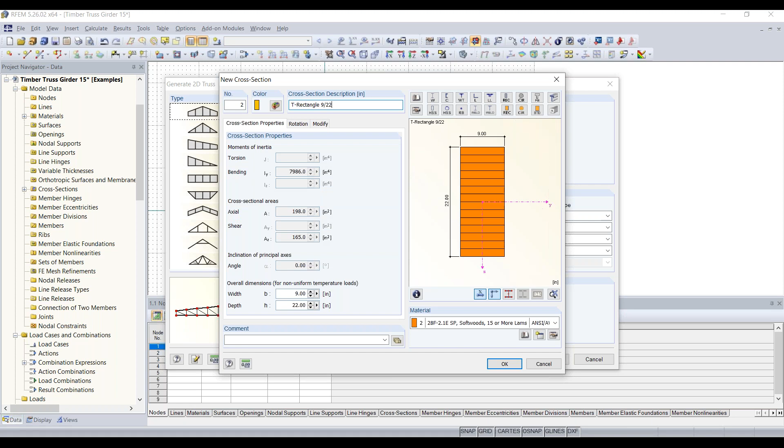Now what I can do is the same thing basically for the lower chord, but I'm going to create a new cross-section, and then I can simply hit Control-V and copy that cross-section description into the box up here and change my material. Then for this lower chord, I just want to change it from 9 by 20 inches to 9 by 22 inches, just to increase the depth, and hit OK again.

And then for the diagonals, it's the same procedure, but for this one we're going to change our dimensions from 9 to 8, and then from 22 to 8. So our diagonals are going to be squares, 8 by 8, and we're going to change the material again.

And then lastly, we'll create a new cross section for our verticals, and they're going to be a little different from our rectangular diagonals - they'll be 8 by 4, and then change the material again. So now we have all of our cross sections defined.

We also have member types defined here. For the upper and lower chord, we have beam type selected, and then you'll see for the diagonals and verticals, they are truss types. The difference between a beam member type and a truss member type is that a beam has fully fixed connections and all 6 degrees of freedom.

So the translation and rotation is all fixed, so moments will be transferred between connections. But for a truss type, this is a pin connection, so rotation is allowed, so there will be no moments transferred between or through connections to other members for trusses.

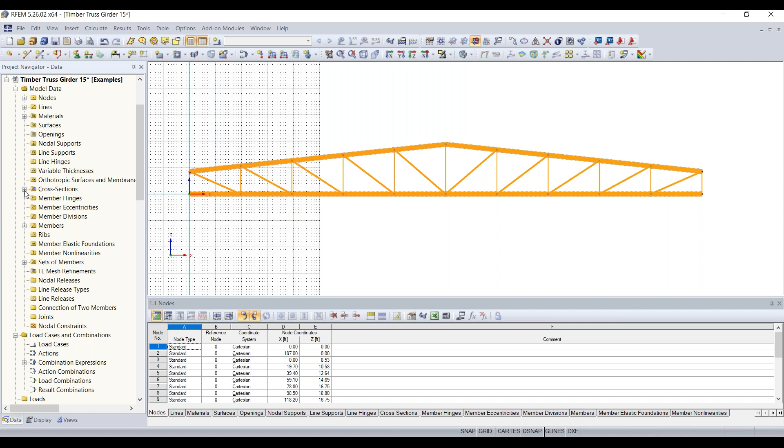One thing I do want to change is the verticals. We should probably increase the cross section of them. They are looking a little slim, so what we can do is go to cross sections, double click on our 8 by 4 cross section, go up here and change this to a depth of 6, and then we should have an increased cross section there.

The next thing we want to do is delete the bottom left and right members, because we're going to support our truss at the ends of the upper chords here. So what we can do is hold Control and select these bottom left and bottom right hand members and delete them. And then we want to delete the lines there as well.

The next important thing we want to do is make our outer diagonal members beam types here, because if we leave them as truss members, which they are right now, then there will be no bending moments transferred between the bottom and top chords.

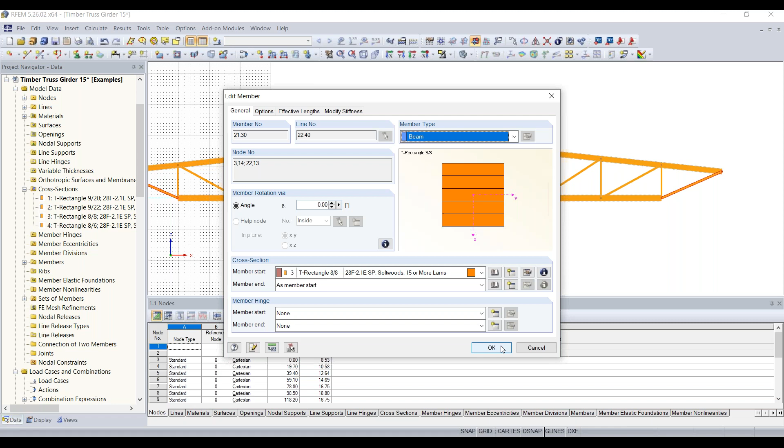So I'm going to hold Control, select both of them, and double click on them. Then we can go up here to member type and change that to beam. This is a good visual: if I have them set to truss, you can see the member hinge is grayed out, meaning that they're pin connections and we can't choose the member hinge for a truss member. But if I choose beam type, then you can see that the member hinges are available to be customized. So we'll click OK.

Then we also want to make sure these members are included in our set of members. A set of members in RFEM is basically multiple members all combined into a set. So if I change my rendering to wireframe and zoom in, you can see my top chord here has a dotted line around all of the members up here, showing that these are all within a set of members. Basically, a set of members allows you to easily show the results for all of these beam segments as one large member. This just allows you to view the results easier.

It also allows you to apply loading easier, and it allows you to run designs, or design all of these members as one long continuous member. So you can see that the top chord has its own set of members, and the bottom chord is also a set of members.

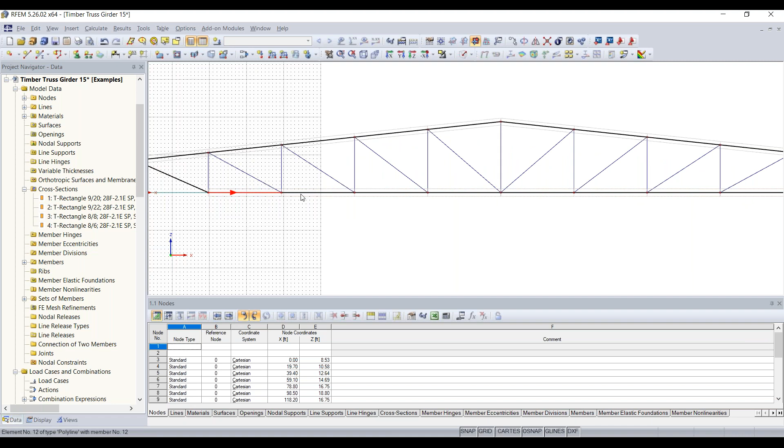But what we want to do is, you can see these diagonals are not part of the bottom chord set of members. So we can just double click on this dotted line here, and this will open up the edit set of members dialog box. You can see this number, the second set of members lower is defined as the lower chord, and members 12 through 19 are included here, but we want to include the diagonals. So I can select them graphically, click OK, then click OK again, and now you can see my diagonals are part of my bottom chord here.

Now we can add in the supports for this truss. So we can go up here to new nodal support, and for the left side support, this is going to be a hinge support. So what we want to do is choose hinged, and you can see there's no rotation about the y-axis because this is just a 2D model. So I'll add in that hinge support on the left-hand side.

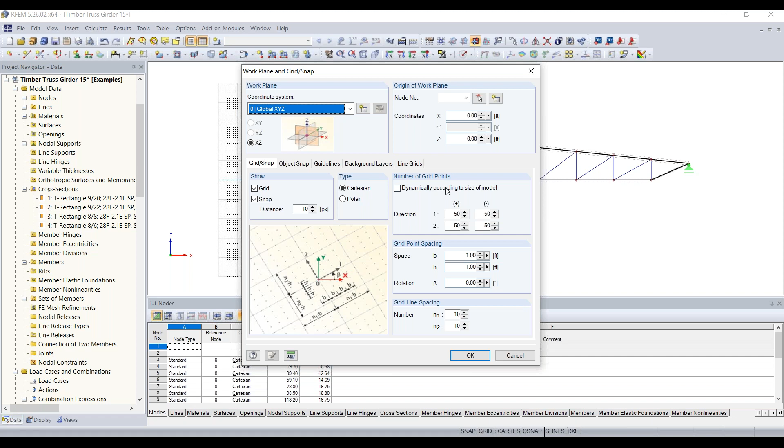We can have the grid automatically adjust to the size of our model. To do that, we go up to the settings of work plane, and there's an option called dynamically. So for the number of grid points, we can have this set dynamically according to the size of the model. If we check that option and hit OK, now you can see our grid has automatically adjusted to the size of our model.

Now I'm going to just change this back to a solid transparent display. And that's basically the whole modeling process done easily with the help of our modeling tool.

Before we get into adding the loading and everything, I think now is a good time for questions before we take a break. So Amy, if there's any questions. Yeah, we had a few questions.

The first one is how to release moment between a surface and a beam. I had already explained that this is with the use of a line release. So it might be worthwhile to show somebody, you don't necessarily have to go through the whole process, but just where it is in the project navigator and how it could be applied. Okay, yeah.

So if you have a beam framing into or attached to your surface on the edge there, and you want to release the moments between that beam and the surface, like Amy said, you can use a line release. If we go to the project navigator and find line releases, you can see there's none in this model, but you could right click here and choose new line release.

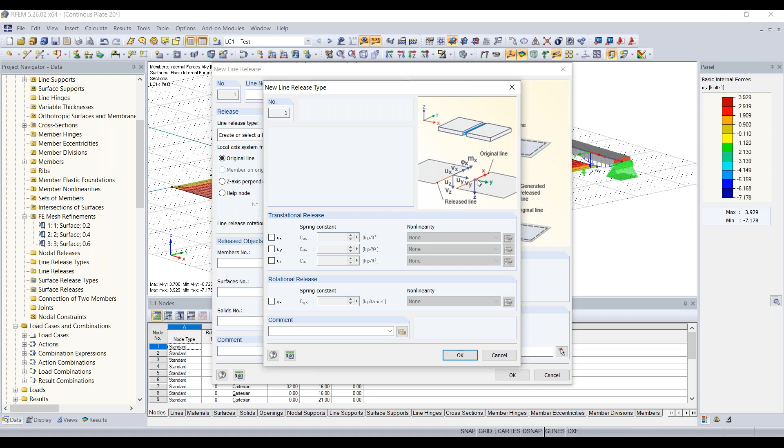Basically what you would do is choose the line which you're releasing graphically, and then you can define the release. So since you wanted to release the moments, you go down to rotational release and activate that, and then only the moments between that line and the surface or beam would be released. Then you would just choose or tell the program what surface that beam is being released from, and that's basically it. So that's the basics of how to use this line release tool to release the moments between a beam and a surface.

Okay good, that should answer that question. The other question is, let's say a user wants to only work with a particular story and they want to activate that view. I think it's worthwhile showing the different visibility options and creating user-defined visibilities.

Again, just a short example would be fine. And to preface this, we don't have the concept of stories, floors, or diaphragms in the program quite yet, because this is a general FEA program, unlike ETABS which is meant for building structures only. That has the concept of stories and floors, whereas something more like SAP 2000 is what RFEM is more comparable to. But with that said, it is possible to create these user-defined views that Alex will show you, where you can create your own story 1 view, story 2 view, and quickly switch back and forth between them.

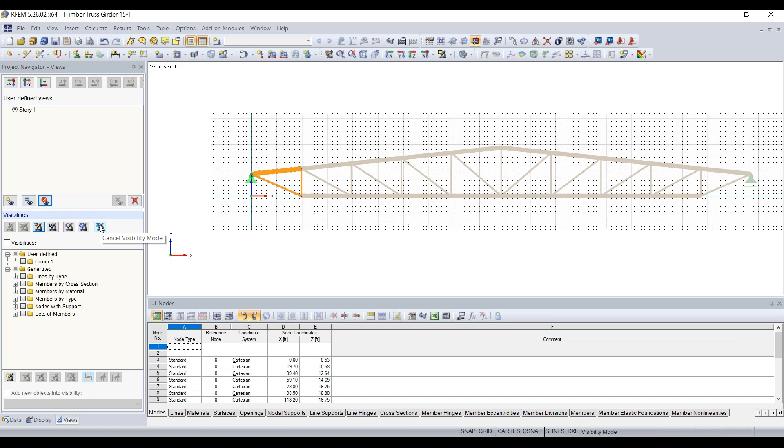And now you could turn off show hidden objects in the background, so that would be your story 1. Every time you could create multiple stories, and then all you'd have to do is just go to your user-defined view and check on which story you would want to see. That's the perfect way to do it. The point being is that you can cancel out of this visibility, go back to the full structure, and you can always go back to activate this visibility story 1 that you just created, and it will bring you back to that original definition. So using those user-defined visibilities will be helpful.

Okay, so we have a question about how to optimize members for design. I believe that you'll be covering this in the add-on module RF Timber AWC for this example, so we don't need to cover that now. Just maybe worthwhile to remember to show that, but I believe you already plan to do that.

The final question, is it possible to create tapered members for the RFEM structure? I think that's worthwhile showing the example. Again, no need to do it, but where you can set the member start and member end as different cross sections.

So to create a tapered cross section or member, the easiest way to show this is I'm just going to edit one of these real quick. That's where the member end comes into play. So let's say you wanted to taper this member from the start, and you wanted it to start at 9 by 20 inches or whatever, and then you wanted it to go to, say, 5 by 10, you would just make the member end something smaller. Just as an example, if I change this to 8 by 8 and click OK, you can see that RFEM will interpolate the start to the end, and that's how you can taper your members like that.

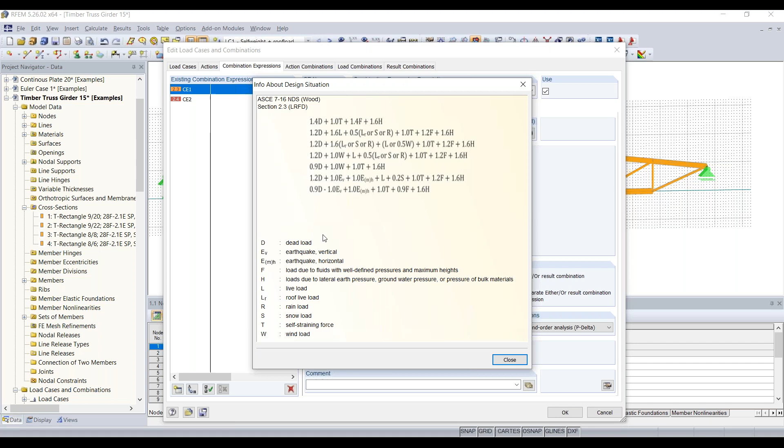And then we can take a look at our action combinations. Also the next tab is our load combinations, and this is where basically multiple load cases are going to be combined into a larger load case, essentially with or without factors applied to them. So we have this base generated based on our design situation and the standard. For example, this first combination is just 1.4 times our dead load.

And the last tab is our result combinations. Also, again, just to reiterate, load cases are calculated on a first order analysis, and the load combinations are all by default calculated based on a second order analysis.

For the result combinations, these are envelope solutions that summarize the maximum and minimum results from all of the load combinations included in them. For this first result combination, we have all of our LRFD combinations, or ultimate limit state design, and then we have our serviceability limit state or ASD combinations combined into this second result combination. This just combines the results, so you could create result combinations without having to rerun them if you needed to.

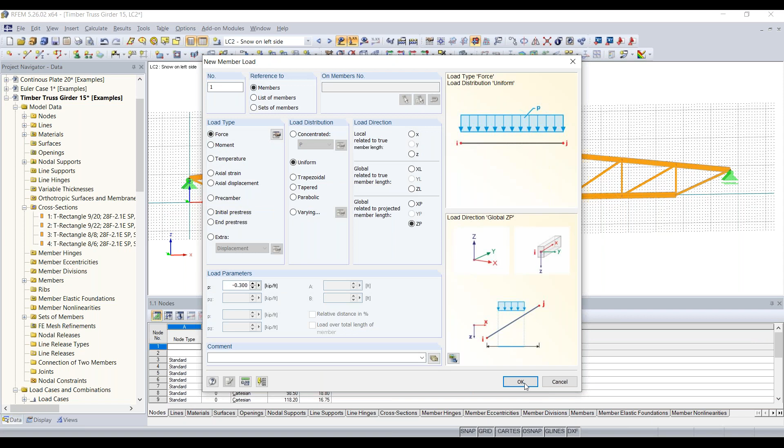What we can do is just highlight this whole left-hand side. I only selected the beams up in the upper chord, and you can see it's the projected member length, taking into account how snow will act on our roof. We'll right click, and now do the same thing for the right-hand side. I'll rotate my model, highlight again selecting only the beams up here, and choose new member load.

Everything will stay the same, pretty easy. Since we already selected the members before going into the tool, if I click OK we applied our load. I applied it to the wrong load case by mistake, so Control Z is your friend. We go to the next load case and redo that real quick for our snow load on the right-hand side. Now we have our snow load for the right-hand side.

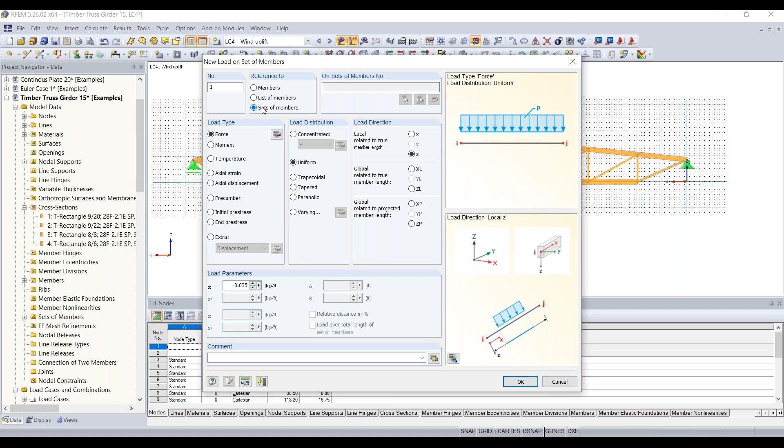Now all we need to do is add in the uplift, so again we're going to use the new member load tool. The thing we need to change for this is the load direction. We want this according to the local related true member length and the local z direction, so you can see that lowercase letter. We're going to make this negative 0.035, or 35 pounds per foot, and click OK. We also need to change the reference to set of members, so we can select our upper chord, then click OK.

Now we have our wind uplift taken into account.

So I'm going to run the calculation now. I'll click Calculate All, and while that's running, I would like to ask a question, and then we can go over the answer afterwards.

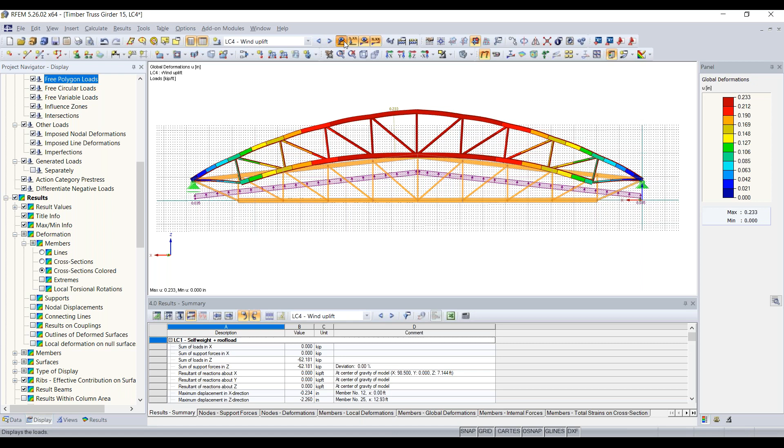There's three major steps when evaluating your structure's results. The first step I would recommend taking is to always take a closer look at your modeling to make sure that all of your members are connected to each other.

This doesn't really apply too much for this model since we had RFEM generated for us, but if you have a lot of members and maybe your results aren't matching up to what you expected, I would always recommend zooming in close to all of your connections, because sometimes your connections may look from afar like they're connected when in reality, maybe one of these lines is just slightly off from the node, causing a discrepancy. This mostly occurs when importing a model from AutoCAD or from maybe Revit. Sometimes imports have unconnected members because of difference in tolerances between the two programs. So it's always important to check that.

Second step I recommend taking is to always check the deformations of your self-weight or dead load case. So if we go up to our self-weight load case and show the results, right now we're looking at the global deformations, and you can see that our deformation is symmetrical, which is good. We have a symmetrical structure here. We can just look at the Z component. This is something that you would want to double check if you have a symmetric structure, is if your deformations are symmetric.

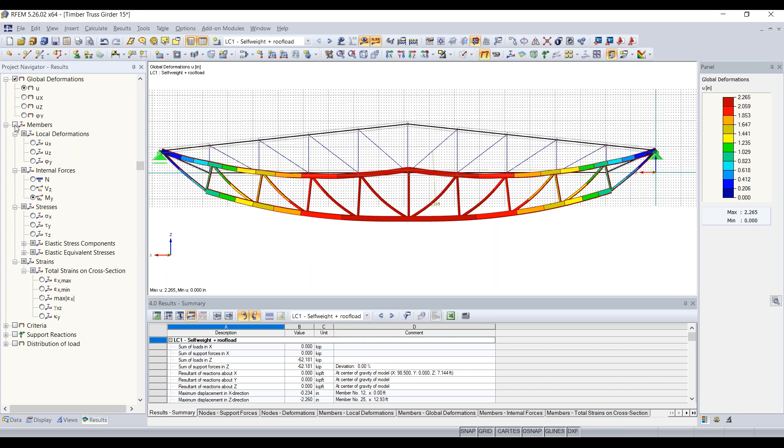And then the third check is to look at your internal forces. So again, if we activate member results and take a look at our normal forces, you can see that our upper chord has compression forces for normal forces, which makes sense in this layout. Our bottom chord is blue, positive values, telling us that we have high tension forces, which also makes sense for this loading setup at the bottom. You can see in the middle we have the highest tension forces of around 90 kips.

You can also take a look and see, this is important to point out, that we have very high forces on our outside diagonal members, which I did on purpose. So I can show you later how to optimize these, since these will be critical members, because their cross section is a lot smaller than the main cross sections we created for our bottom chord, and they don't really compare too much in size with the bottom chord and the tension forces it's receiving.

Next we can also take a look at shear forces. These are pretty low, which is expected with a truss, since we're not really expecting too high of shear forces. And then also our bending moments, we can see the same thing as shear. They're not too high, which is as expected since trusses mainly transfer forces such as normal forces, tension and compression. We're not really too focused on bending moments.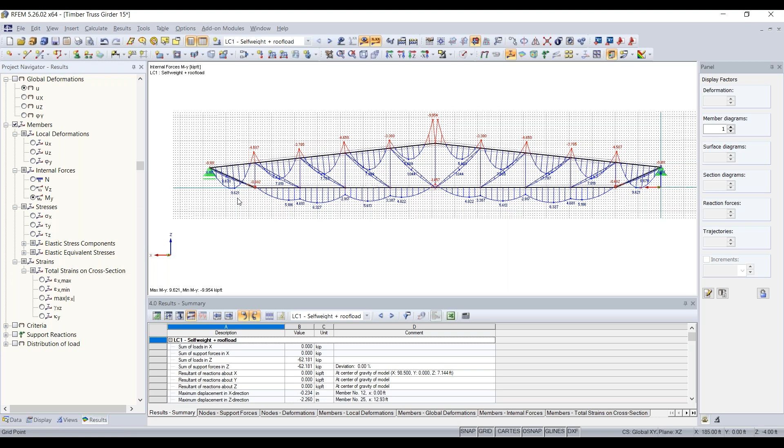Now you can also check your support reactions. On the left-hand side, this is another great way to verify. I can also turn off the grid down here so we can see those values easier. On the left-hand side, we're getting 31 kips, and on the right-hand side, we're also matching that number. So with a symmetrical structure like this, it's good to see both of those matching, that's what we would expect.

The last way to check your structure is to go down into the table and take a look at table 4 results. You can see for the self-weight plus the roof load that we can take a look at the sum of the loads in the Z direction, and then the sum of support forces in the Z direction. Both of those values match: 62.18 kips for sum of loads, and 62.18 kips for sum of support forces. Both of those should match because of statics and reactions to the loading, and we're getting a deviation between those of 0%. Anything other than 0% deviation will be flagged by the program, an error will be thrown, and that just means that something is not correct with your model.

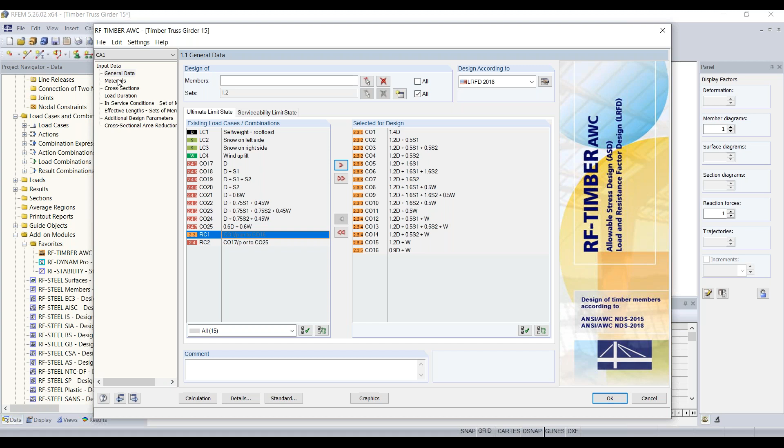Then what we can do is move on to the materials, and you can see we have our materials listed. Concrete is red because we can't design concrete in the timber module. But you can see we have spruce chosen for all of our members. If we had multiple materials or used multiple materials, you would see those listed here. And then you can also see the material properties listed down below for a quick look.

Then you can also see our cross sections that we're using. Those are automatically imported, and you can see we have four of them: 9x20, 9x22, and our other ones, and we can click on those. The optimization column here, I'll get into after we run our results, but keep that in mind that that's there.

Then we have our load durations, and you can see these are automatically set based on the action that you choose for your load case, so you don't need to worry about that. You can see the design situation or shortest load duration in a combination, or you can choose user-defined settings.

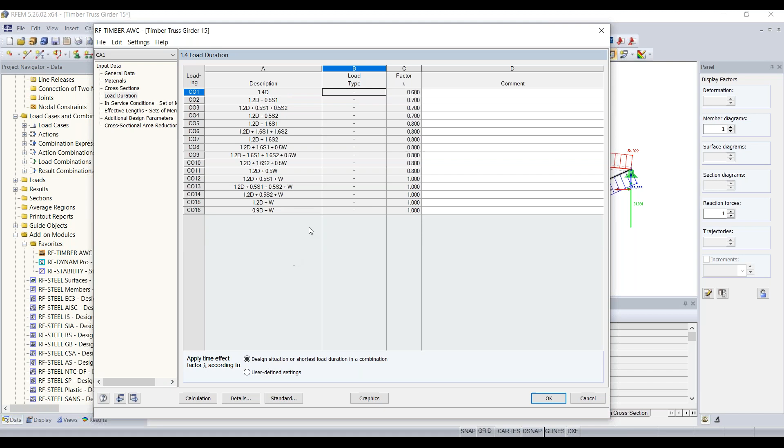For now, we're just going to leave that as is and move on to the next category, which is service condition. We can choose between dry or wet conditions, and also the temperature at which the structure will be placed for both sets of members. We're going to leave that as default, less than 100 degrees and dry conditions.

And then the next category we want to get into is the effective lengths. For this, we're going to have to make some assumptions. This is for your stability checks: buckling about the x-axis or strong axis, buckling about the weak axis or y-axis, and then lateral torsional buckling.

The first assumption we're going to make is that we'll have purlins connected to the top chord here, and all those purlins connected will be going out of plane. We'll assume they're framing into the top chord every couple of feet and that they are fixed to it. This means we do not need to consider buckling or LTB for our top chord, so we can uncheck buckling possible here, and uncheck the possibility for lateral torsional buckling.

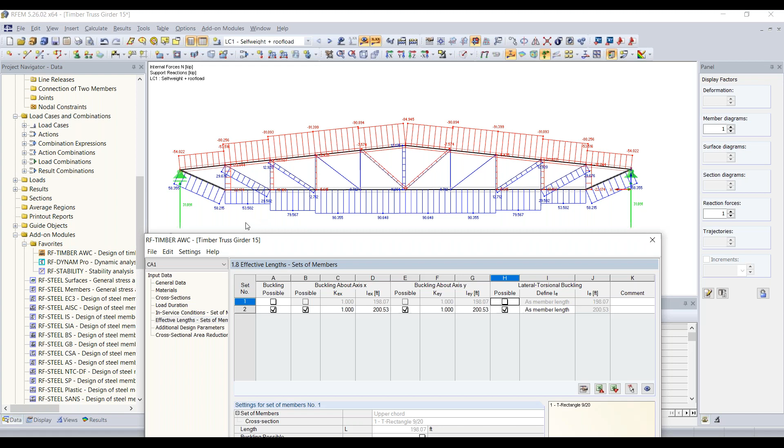Taking a look at our bottom chord here, you can see we have no compression forces, only tension — that's what the positive values in the blue coloring show us. Without compression, we also do not need to consider buckling or lateral torsional buckling, so we can uncheck those as well.

Another way of doing that would just be to go to the details option here, and then under stability, we could uncheck perform stability analysis. So either way works for that.

And now we have all of our parameters. There's also some additional design parameters here. Right now by default we're taking into account there's no shear reduction and we have edge bonding. If you needed to change any of these, maybe you have no edge bonding and an odd or even number of lams. If you want to take shear reduction into consideration, we also have that option. Under cross-sectional area reduction, we don't need to worry about this for this example, so we'll leave that as is.

And now we can run our calculation. But before we take a look at our results, I have another question.

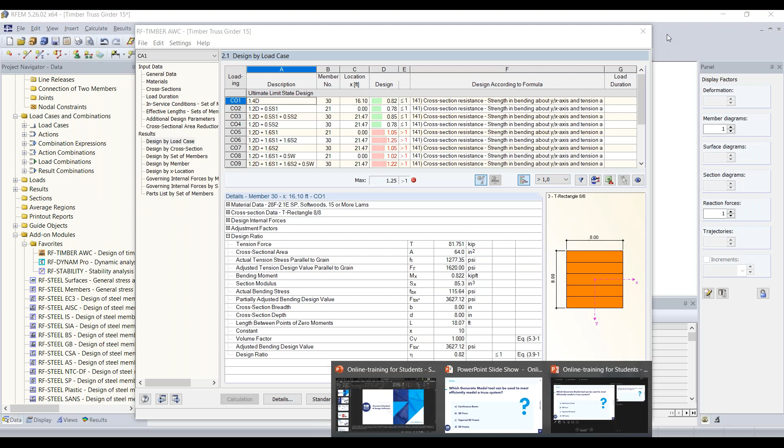So a statement really — if you could answer true or false, and then we'll go over the correct answer.

All right, so looks like most of you answered false. I see a couple trues. So the statement was: a 2% deviation for the sum of loads in Z versus the sum of support forces in Z is sufficient — and that's false.

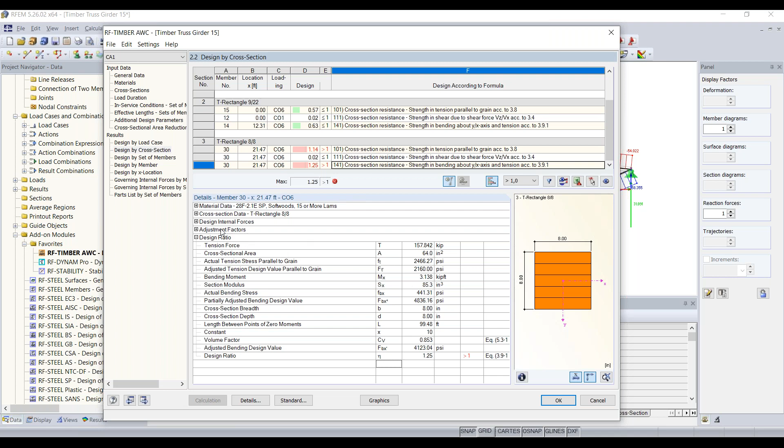So we can go through details such as material data or characteristics, cross-section data, and design and internal forces. You can see here we have a normal force in our cross-section, a max of 157 kips, and also some bending moment of 3 kip-feet.

According to the AWC design, we can take a look at our adjustment factors, and we also nicely have listed references to the code here, showing where we reference the code to come up with these factors. So if you ever need to double check any of these, it's great to have those code references.

So that's for tension stresses and then our bending stress adjustment factors. Then we have our design ratio, which goes through and shows you the factors and parameters that go into coming up with the final design ratio. Again, we have some code checks down here showing which equations we're using, so it's always good to know that.

Now we can go through and I can show you how to optimize this cross section. The first thing is we don't want to optimize just to meet that 1.0 design ratio. So we go to details, then other, and change the max allowable design ratio to 0.9, then click OK.

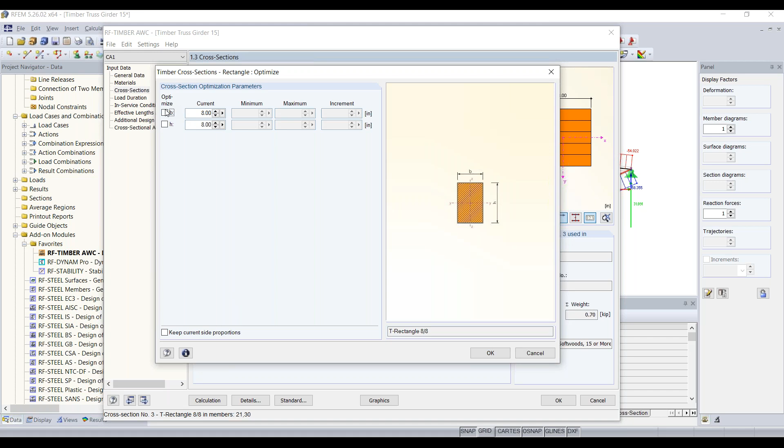Then this box comes up and we can choose to optimize our base and height. So we'll choose base and height, and then choose the option to keep current side proportions, so the ratio between base and height stays the same, which is nice.

Minimum doesn't really matter since we're exceeding our design ratio, so we'll set that to 8. Maximum we'll set to a whole number of 17. For increments, we'll set to 1 inch to increase or decrease by. You can set this to what you prefer, but this works out here, so we'll hit OK.

Now all we need to do is hit calculate, and you'll see that we are now meeting our max design ratio. All of our cross sections here are passing, and our max design ratio now is 0.79 instead of above 1.

We go to design by cross section and scroll down to our diagonals. Now they are optimized to a 10 by 10, and the max for those is only 0.7.

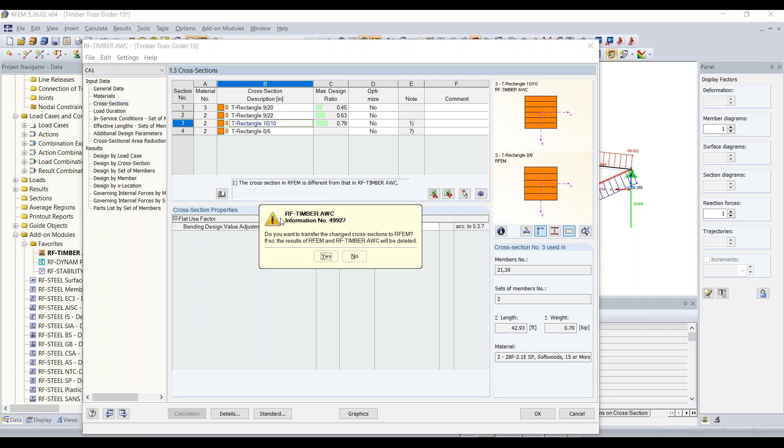So after you optimize your cross sections, you need to right click on the blue ones, and if you're happy with that optimization, hit export cross section to RFEM. If you have multiple cross sections to export, you can hit export all cross sections to RFEM. It will ask if you want to transfer them, noting the results will be deleted. We'll hit yes.

Then we can just hit recalculate, and the results will look the same, but now the cross section in RFEM is actually changed. So that's how you go about optimizing cross sections using the add-on module.

Now what we can do is go up to File and Rename, and we can have multiple cases. This case we'll just call the upper plus lower chords. And what we can do is create a new case, and we can design all of our diagonals.

And we'll save our changes. Then what we want to do is uncheck - we don't want to design all of our members, we just want to design the diagonals. So we can hit this button to select them graphically.

An easy way of selecting all of them graphically instead of clicking each one is to use this tool called Select Special. This is handy if you have a large model and need to select all of the same cross-section within it. Hit Activate Members, go down to Members, hit Activate, and then choose which members we want to select. We can select ones with specific cross-sections - we only want our 10x10s. Click OK.

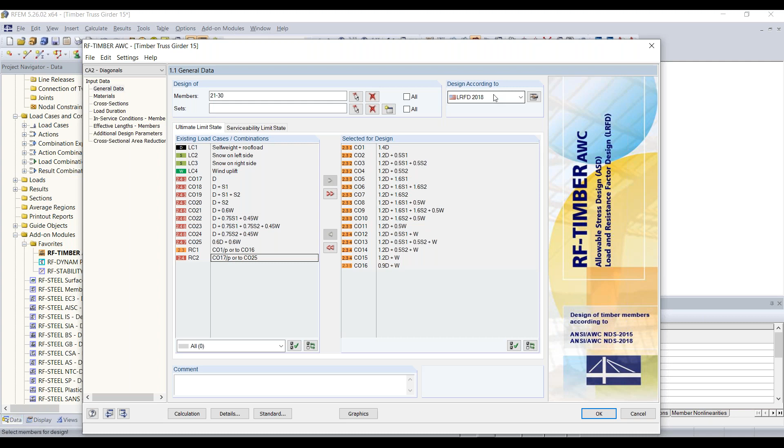So we can select all of them, move over our combinations, and choose design according to - go through our materials, cross sections look good, load durations, and service conditions will leave the same.

For the effective lengths for all of these diagonals, this is where we leave all of them as the full member length, since they could all be experiencing buckling or lateral torsional buckling. Additional design parameters will also leave the same.

And then we can run our calculation. Now you can see that we have our max design ratio of 0.82.

If you're curious which combination is causing the highest design ratio, we can filter over here to max and hit apply filter. Now you can see that bending and tension is what's causing it, and combination 6, member 30, is causing our highest design ratio. So, good to know.

If I click on the member here, this red arrow shows me which member is giving us the highest design ratio - our critical member, basically.

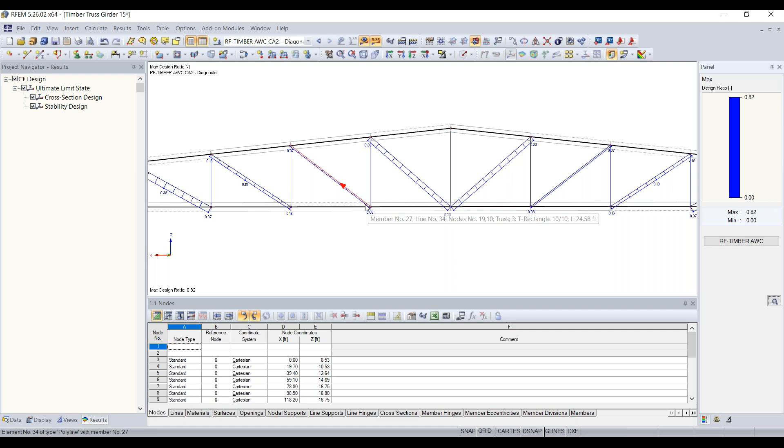We can also take a look at our results graphically if we wanted, so we hit graphics, and we can see our design ratios as diagrams on each of our members here. These diagonals in the center are fine, we don't have to worry about those at all. We could, if we wanted, increase or decrease those cross sections. And we can go back.

Then we can create a new case and design our verticals. Again, uncheck all graphically and use our Select Special tool here. Actually, I forgot to - oh no, I lost my window.

So I lost my select member window, not sure what happened to that. Let's see if we save - we'll just save all.

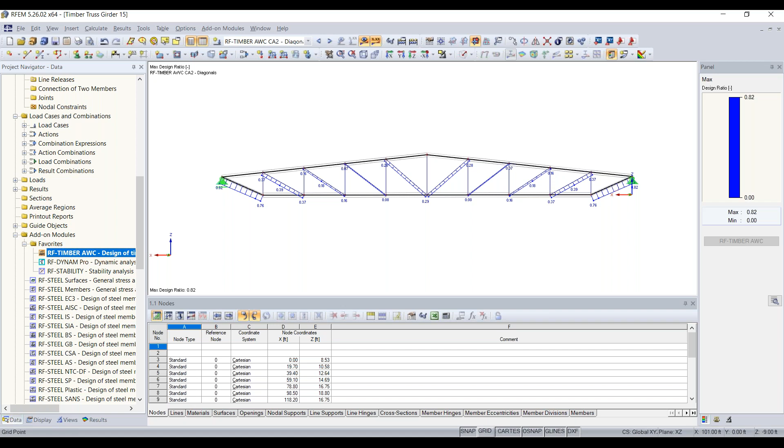The only question that came in was about the ability to analyze shotcrete. I had answered in the chat, but to clarify: realistically, if a material doesn't exist in the program, you can always add a user-defined material. As long as you have those properties, you can copy the existing concrete material and add in the shotcrete material properties, then the full analysis can be completed. I don't know about the specific standard you're referring to for concrete design and whether it addresses a material like this - I know the ACI standard and CSA standard for North America don't address this. So the design modules are based on typical concrete materials, which are listed within the program. But again, it's always possible to analyze any material within RFEM as long as you have the relevant material properties.

I think that's really the only question that came in for now. Maybe a few more will filter in before we wrap up today's presentation.